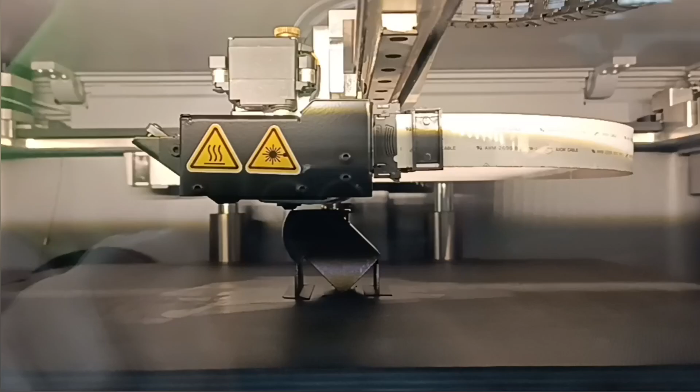Hello everyone, project for today and cover. So, gagawa tayo ng sketch.

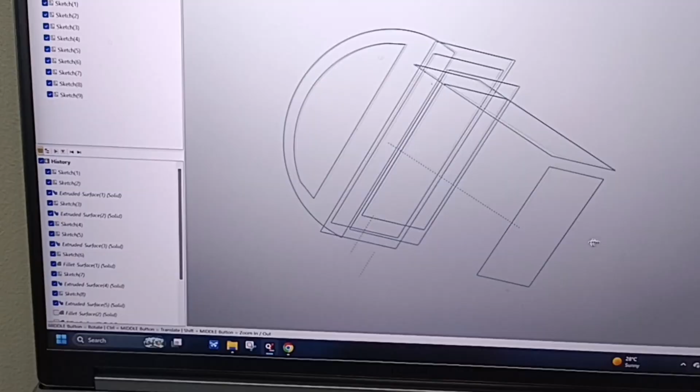Right, so ito yung quick surface reverse engineering. So sketch, so ito na yung object, ito na yung design, cover. Then pagkatapos...

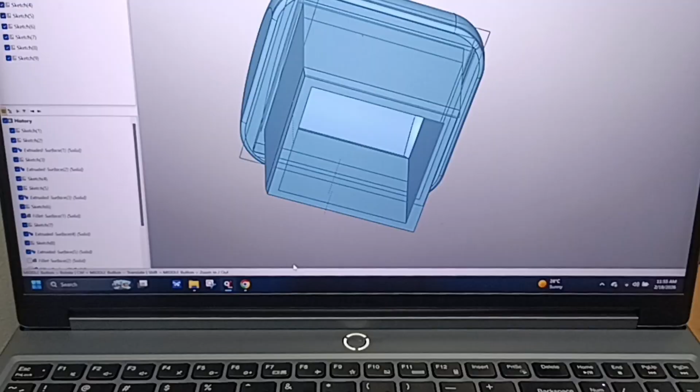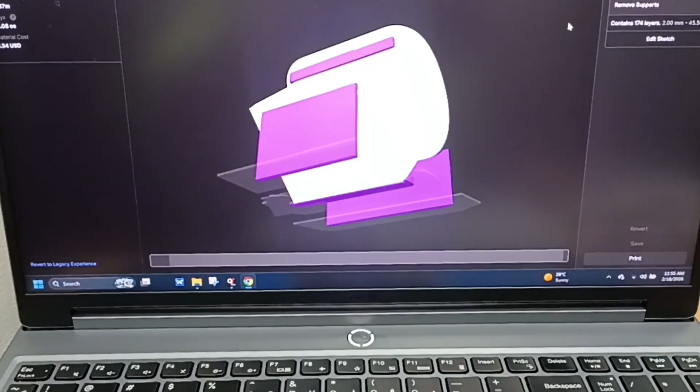Slicing. So kailangan nating i-slice. So na-slice ko na to. Tingnan natin yung parts. Right.

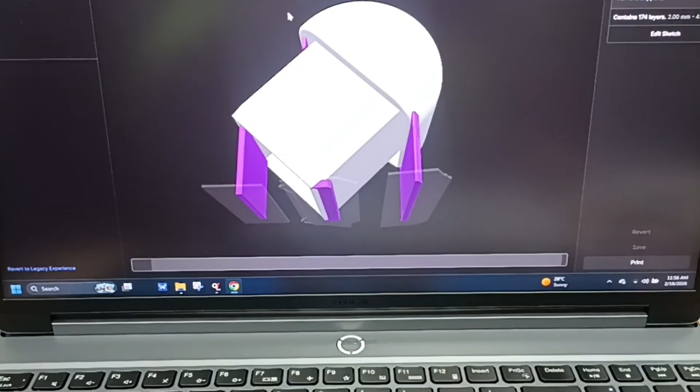So purpose ng pag-i-slice, just ensure the accuracy and to make the parts effective and functional, and also to reduce cost. So dito lahat ina-adjust yung parameters.

Okay. Tingnan natin sa x-ray kung okay yung contact. Okay.

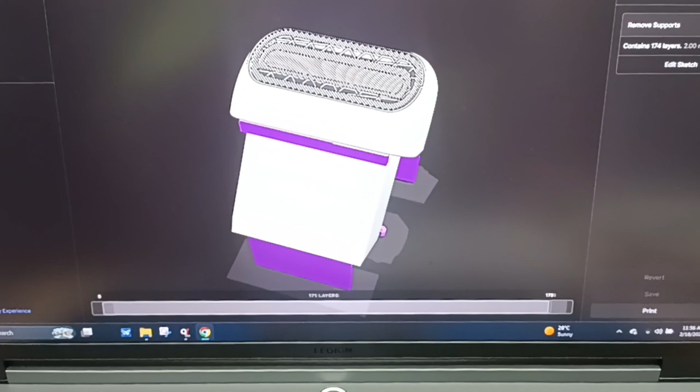So, all parameters set. Then this is the size and printing time, 1 hour and 37 minutes. So this is the amount.

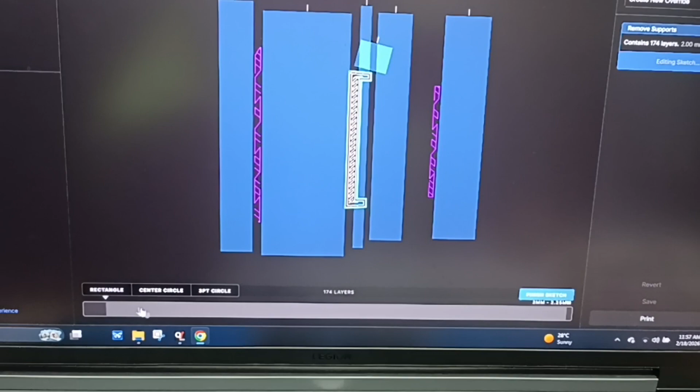Try to check the structure. Okay, rectangle sketch. Sketch is fine. Right.

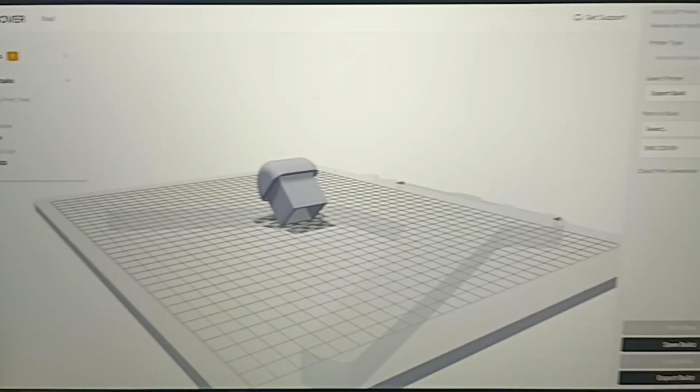So save. Then print. Okay, ito na yung pyesa. One piece, price 1 hour and 37 minutes. Fitting time. Okay, materials goes.

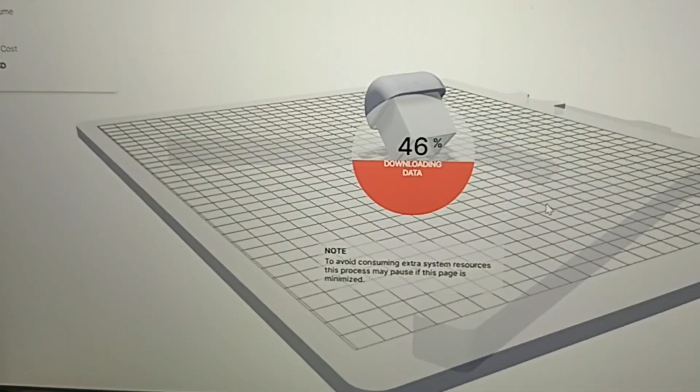Then export. Generating. Then 100%. We have now a file.

Okay, alright, close. And there we go. Once more. Confirm.

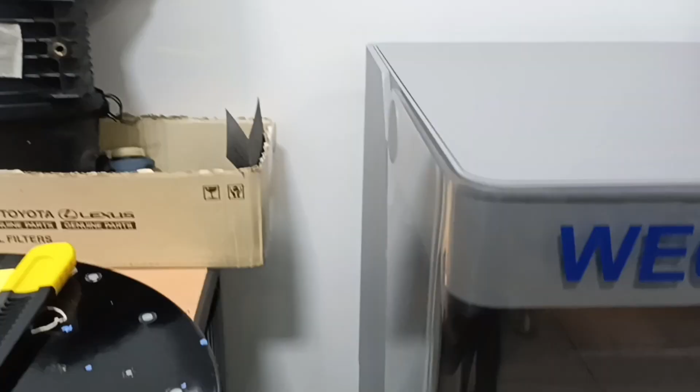So nagre-reading muna. And alright, so there we go. So ito yung pyesa na sinisit natin.

Ito yung okay, nag-print na guys. So ito yung 3D high-end 3D printer from Markforged.

Yan, hindi mo nag-print na siya. Alright. Okay, take a look guys. Alright.

Want to see it on top? Use the top view.

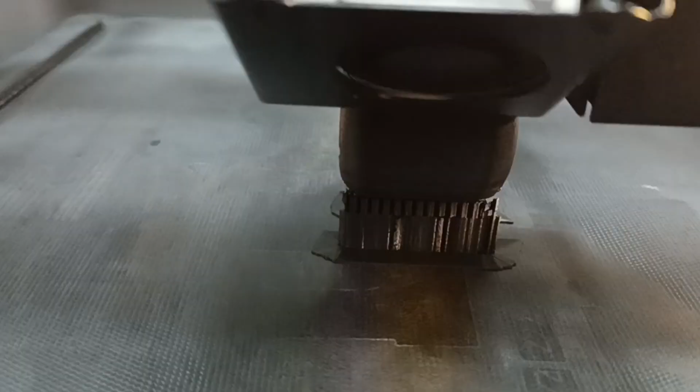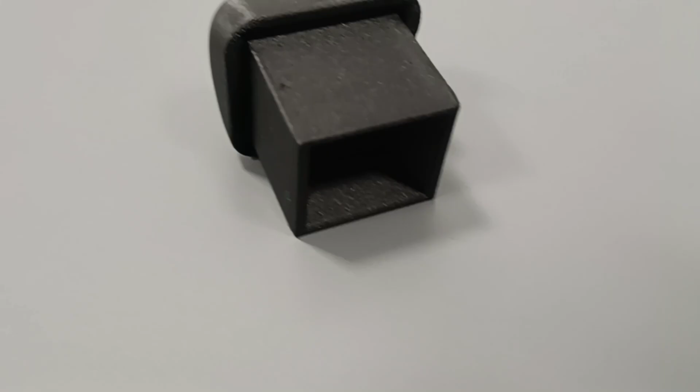Okay, ito na mabuyang, ganito yung magiging resulta niya. Okay guys, look at the surface. Material use, Onyx. Thank you for watching.